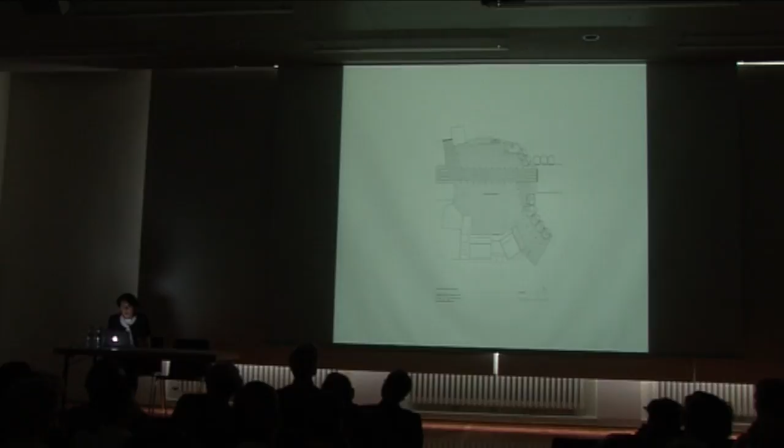So we decided to divide the town hall into two blocks, very tiny blocks. The whole town hall is 300 square meters. So it's really like two tiny blocks, like two houses, but arranged in a way that permits all that open space to build the plaza.

The two blocks are linked by a very light structure where the entrance is placed, and with this decision we built not only the tiny town hall, but we also built the plaza.

...from the new plaza—was to give this tiny building the institutional character that any public building must have, and more so if it's a town hall. So we had the clock, and we had the flags, and we had the plaza. Despite the small scale, really the presence of the town hall is very important in this tiny village.

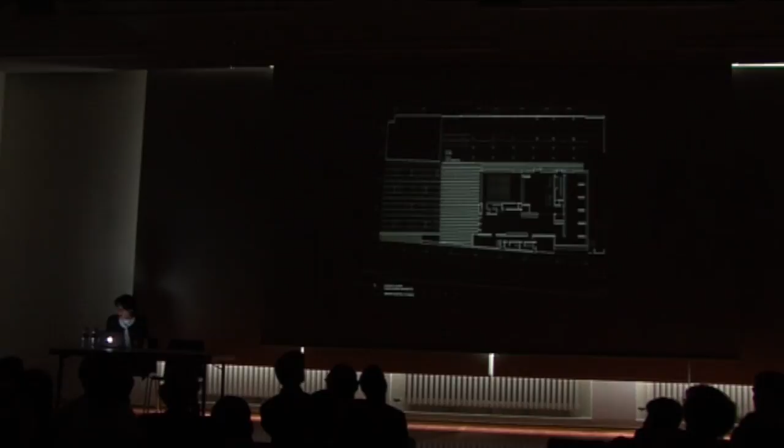And at this point, I also want to explain that this museum in Almería had a beautiful collection of archaeology from Neolithic times, 4,000 years before Christ, and that this beautiful collection was just stacked in boxes in an old warehouse, because there wasn't a place to exhibit all these beautiful pieces.

So it was a necessary museum, but as I said before, the plaza was really the main feature of the project. As you can see, the building is quite opaque towards the city because it's completely surrounded by high-rise dwellings and buildings, and we thought that the building had to be a bit endogamic.

So the building had to be open on the ground floor towards the plaza, but on the upper part it had to be just like Arab architecture that looks towards the interior.

So from the outside it's very compact, and it is built with the natural marble of Almeria quarries. Almeria is one of the places in Spain where we have very important and very large quarries, and we thought it could be a good idea to use this marble to build the opaque facades of the museum.

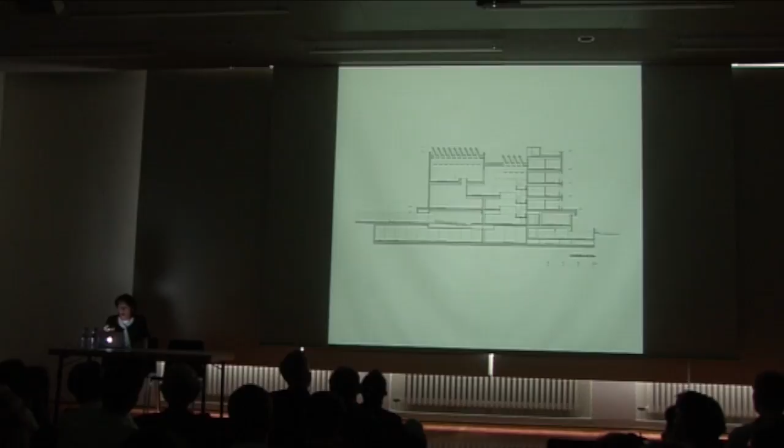The light was also very important, because we had skylights in the roof, but the light in Almeria is very harsh and strong, very white light. So we decided to use a filter.

That's a wooden filter built up with modular pieces of wood, in the same way that ancient Arab architecture also uses these filters for light, to build a ceiling underneath the skylights and the roof. So when the light comes inside, it's not white hard light, but a more delicate light when it comes through the wooden filters.

Well, this is the staircase of the museum that connects all different levels and all the exhibition areas. Everything is open and everything is set up in continuity.

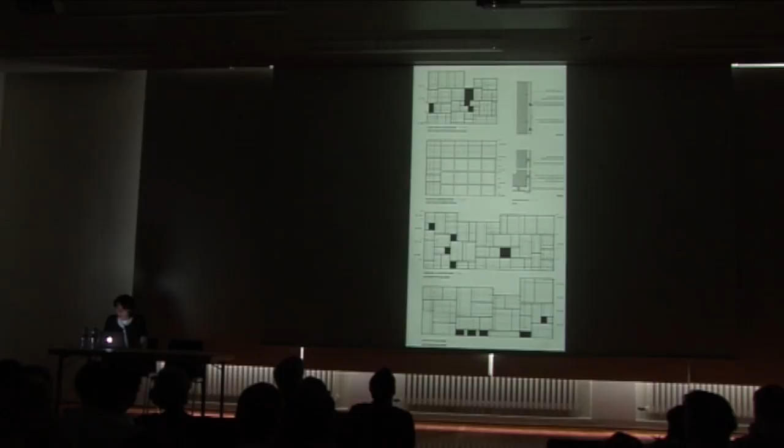Because we didn't have the need of an urban scale on an urban void, since most of the exterior part of the museum is opaque. We only have some viewpoints towards parts of the city that are open onto the walls, so the display of the marble is completely abstract.

Only from the back part of the museum, where the interior parts like the workshops are placed, and where all the offices are placed, we have a more urban character with these openings.

What's most important is that, beside the necessary spaces for the archaeological collection of the Siret collection, architecture has now been able to build a place for the people in Almeria.

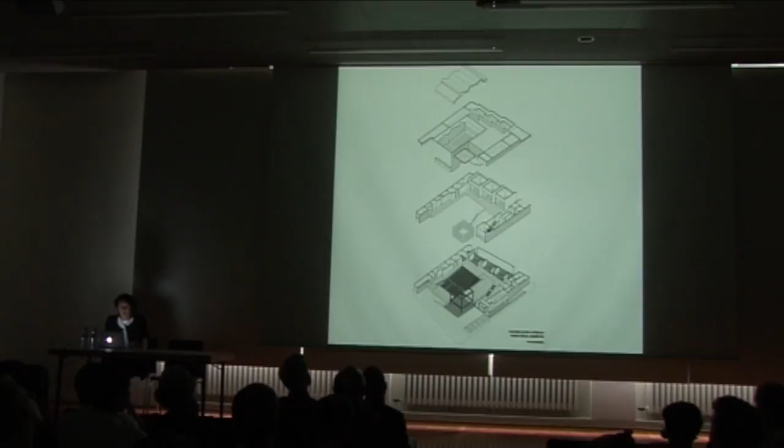This is the simple way in which the program is organized with the auditorium. It seats 700 people, and all the rooms are around the lobby, and the gavia, that's the atrium, is the main feature of the project. That can be seen also from the entrance and from the lobby.

Really, all these indoor-outdoor intermediate spaces are so important, not only in our culture, but in all Mediterranean cultures. There are many beautiful words that sound the same in many languages, just like atrium, patio, belvedere, or galeria. Modern architecture hasn't taken up the best of these beautiful spaces, and in this case we thought they were very important in this place, in Peñíscola.

Well, this is the large auditorium. Here we had a different problem, because we were supposed to have a very little height, only 13 meters, and we had to have all the interior volume for acoustical means. So we decided to build up a very thin layer of concrete that would also deal with all the acoustical part of the program.

But this transparency of the atrium, of the gavia, was important for us, and it can be seen also from the inside of the auditorium. It also shades the interior parts of the lobby, and you can perceive the sea beyond the three-dimensional pieces of ceramic. It's really like a large installation of ceramic, because it's completely open around it, only sheltered on top for rain.

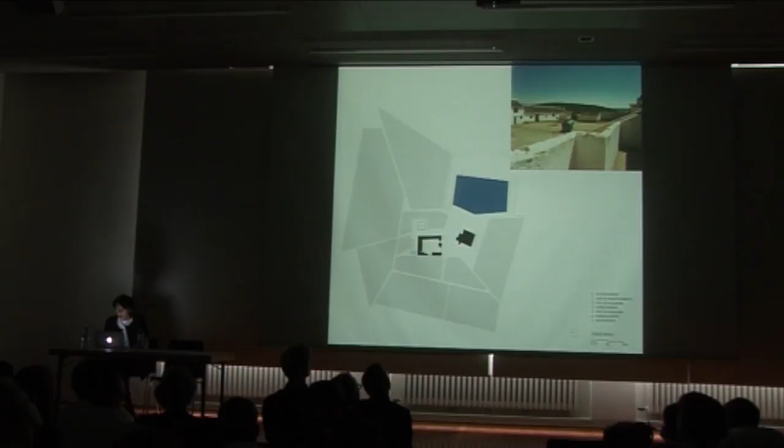So people who were manufacturing quite good wines also wanted to have their winery refurbished. In this case, we had to deal with this beautiful cortijo beside a very large pond in this particular landscape, and we had to build inside the patio of the ancient, existing building.

The patio was very large because originally these patios were used for agriculture, for lorries and cars that came inside. But in our case, the owner wanted to have all these new smaller pieces of architecture, such as rooms for tasting wine, shops, restaurant, or an open space for events and for meeting people, and for meeting points or small congresses.

So we decided to divide the interior part of the patio into different parts with the construction of this star-shaped canopy. It's a very light metal canopy that divides the interior space of the patio, which was very large, but it didn't touch the walls of the existing cortijo. So there is an old architecture and a new architecture that don't touch each other, but are set up together, trying to dialogue to have a new meaning and new uses for the ancient construction.

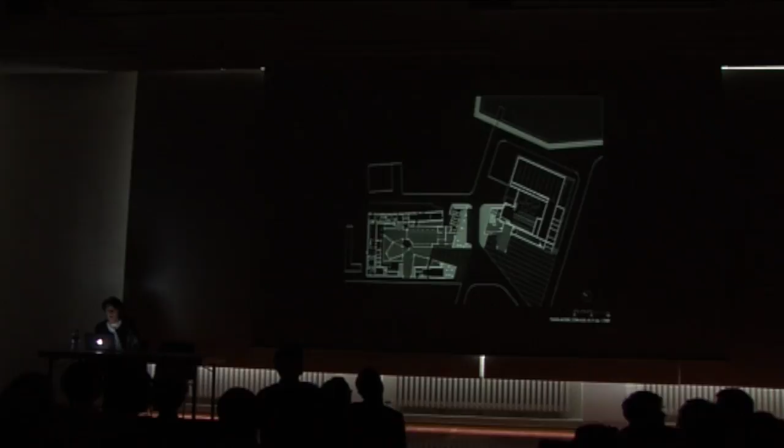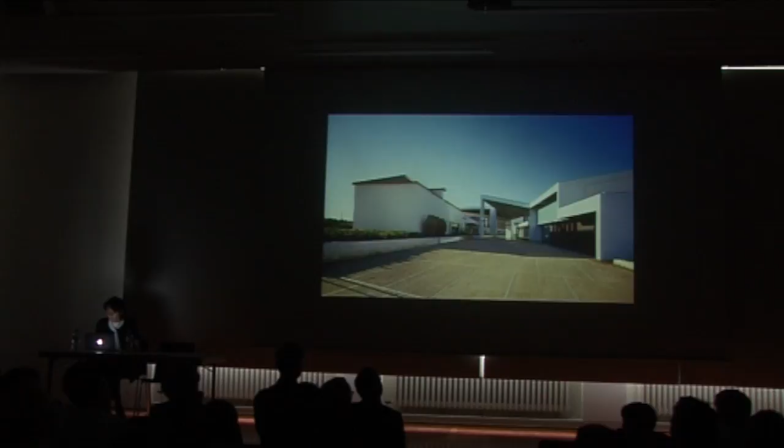As I said, it's a very light metal structure. The peaks of the star volume open towards the landscape, and they give an entrance towards the new complex. All the structure was prefabricated in steel, and one can see the old parts of the existing building and the new architecture, but also intending not to use the same material—one is steel and wood, the other is plaster and brick tiles—but to use the same colors, orange and white, both in the old and the new construction.

And all these open spaces are important in our culture, because we have many months along the year to use them, and people are used to living in the streets and meeting in these indoor-outdoor spaces. Also the large scale of the old courtyard is now divided into all these smaller open areas that are linked to the outside and towards the former construction.

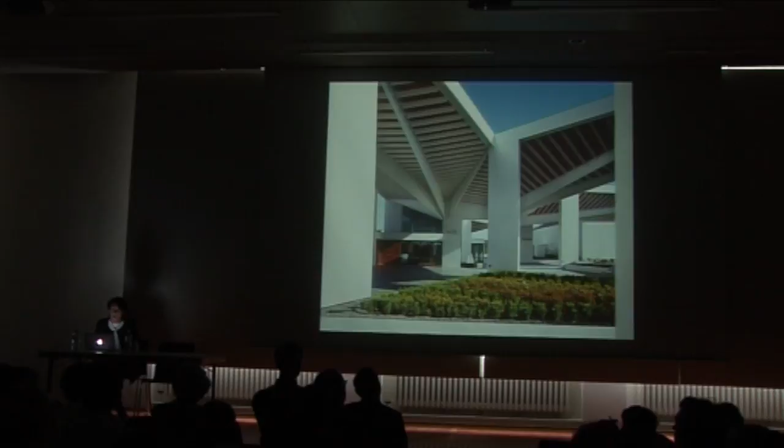And from the inside, one cannot notice when we are inside and outside, because materials are the same and the structure is the same. So there's a sort of transparency between the inside and the outside set up in continuity. In this way, the winery is enlarged and completely transformed, but really we didn't touch the old building—we only refurbished the interior parts.

And at this point, talking about new and old architecture, we had the opportunity to work besides the winery with an ancient construction. We had the opportunity to work with archaeology and with the fragments of the past in these two buildings. One of them is the Olmeda Roman Villa in Palencia, that was opened three years ago.

And the other one, that's the image of the lecture, is this library in Ceuta that also has an archaeological remains and site inside the library. It is important because now in Spain, you know, things have changed a lot for architects.

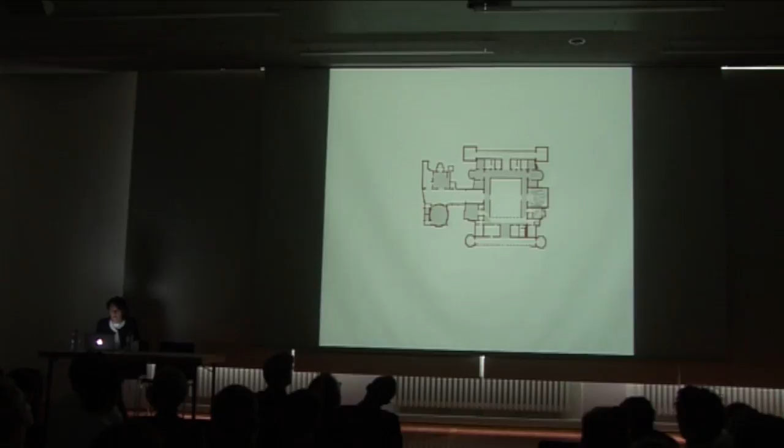The extension of the archaeological area is really very, very big. So we knew how to protect the beautiful mosaics, but we didn't really know how to present the fragments of the past to the visitor, because there are not many references in European architecture for covering such a large excavated area. The excavated area is over 10,000 square meters.

So we decided to wrap up the whole villa with a very light metal facade that embraces and builds a box around the ancient villa.

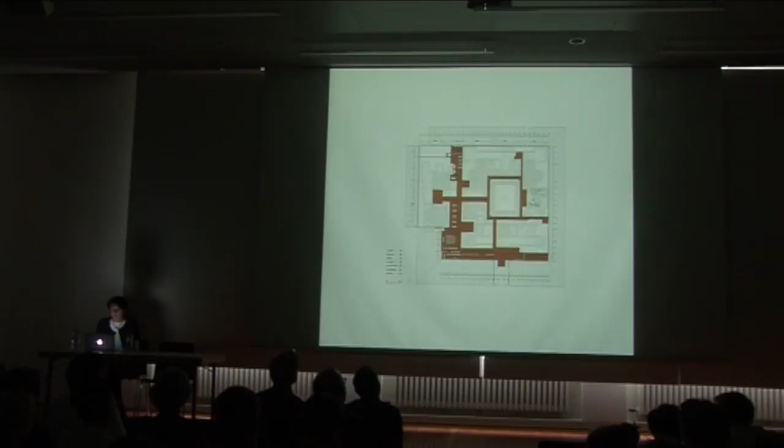We also decided to infiltrate the voids and free spaces with the different parts of the program needed for the museum, such as a restaurant, exhibition area, a very small auditorium, or workshops. Everything was linked by a pedestrian wooden footpath connecting all the different parts of the villa and program, so visitors could understand and it would be comprehensive for them.

The whole plot was covered with 4 vaults, 3 for the villa and another one for the thermal building. Very light vaults built with a metal structure, so as to avoid stepping onto the ancient archaeological finds.

We also wanted transparency inside the space of the villa, a transparency towards all the parts, so the visitor could be aware of the dimension and size of the interior space.

We also wanted to show all the different rooms of the villa, not only the mosaics like a tapestry, but also to show the different heights of the rooms, because we only had the lower part of the Roman brick walls.

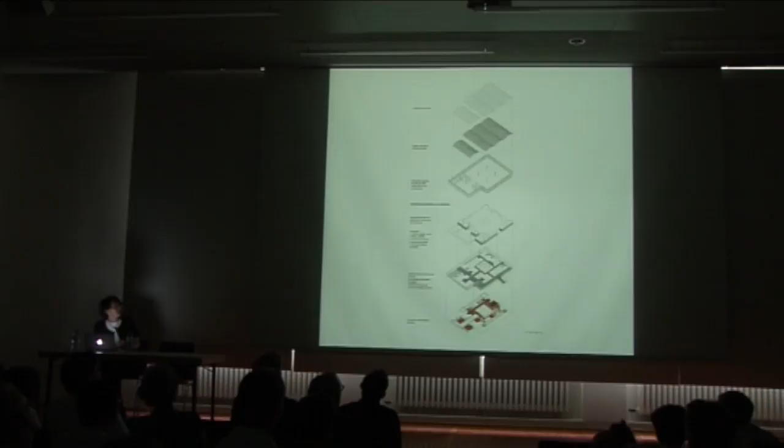This is the display of the program, with the archaeological remains underneath, and on top the different parts of the program, and the light facade that wraps all around it. At last, the covering with these very light metal vaults covers all the space.

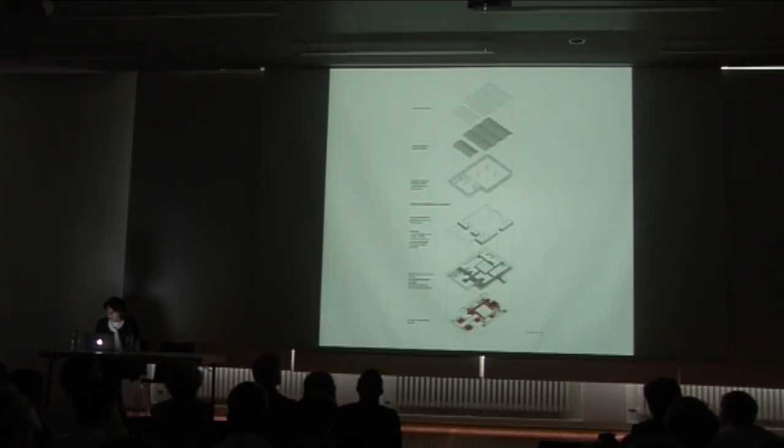The program was very simple, and it is all set up in the same space of the museum.

Here we can see the facade, a folded facade. Now we'll see some photographs.

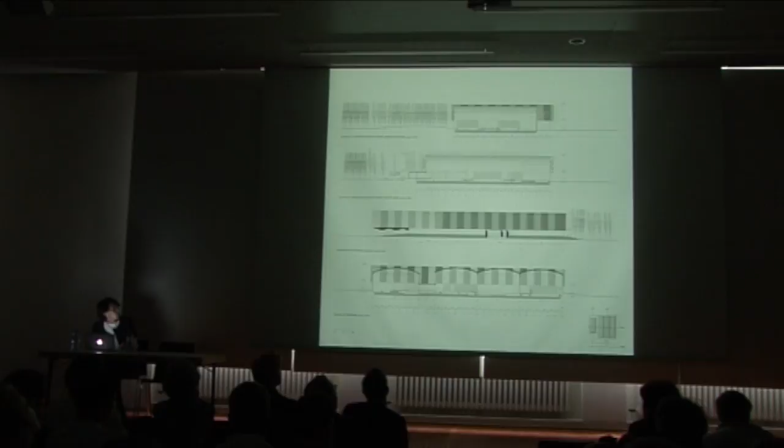This footpath is elevated 1.5 meters on top of the Roman brick wall, so one can see from a very good point of view all the ancient mosaics, and also the whole space of the museum, because this light structure is only supported by 4 columns in the corners of the central courtyard.

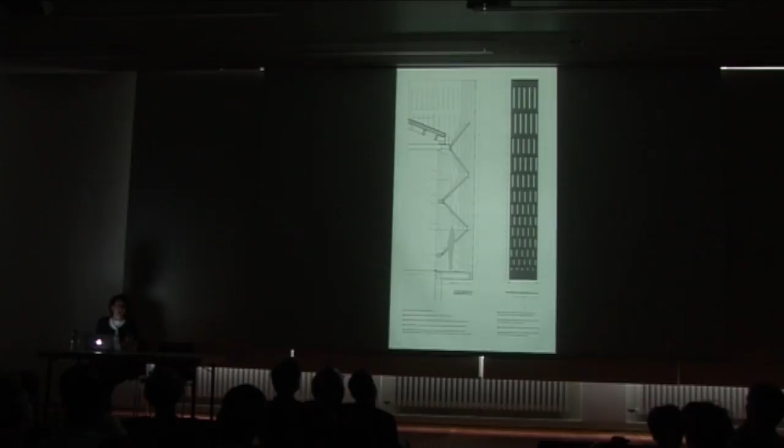And this is the way the structure and the facade is set up freely, so it looks very light, because it's not stuck to the interior part of the building. Between the two layers, we have this technical, very low technical walkway, just for cleaning, maintenance, and lighting.

Transparency was important in order to blend the building with the sky and with the landscape. The whole building is embraced by this green slope that gives us the meter we need to enter in a very slight way on top of the pedestrian footpath. And this is the building in the landscape.

And now to finish, the last building is this library in Ceuta. Now the plan of our Iberian Peninsula is important to explain that Ceuta is really in the northern part of Africa. It is completely surrounded by Morocco, but it is a Spanish city. It's not a colony. It was Spanish for several centuries, but before it was Portuguese.

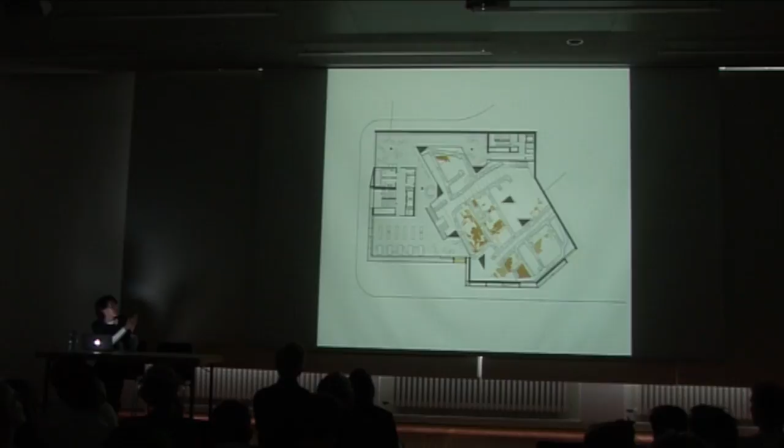Here in this plan you can see this orthogonal direction. I was explaining about the ancient city, the Middle-Age city, that is completely turned towards the orthogonal axis of contemporary Ceuta.

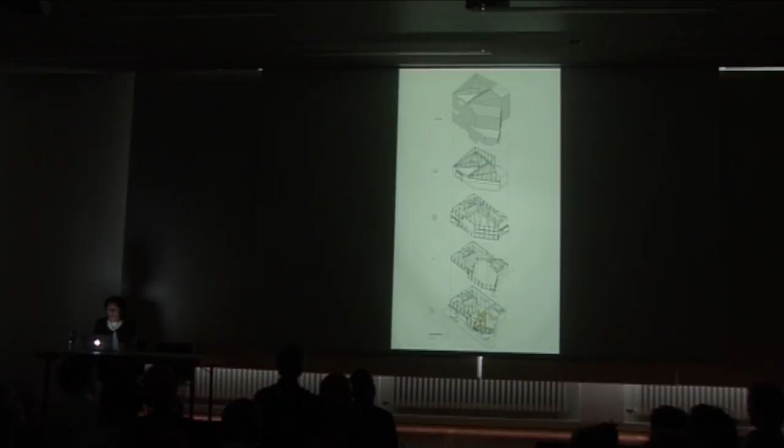So the library grows up in the same way as the Almeria Museum. The library grows up in height, and all the lecture rooms are placed on several levels, all overlooking the ancient ruin and articulated with the site, because the site is so steep.

We have entrances at different levels towards the library. Something funny that's inverted in this library is that the book storage can't be underneath the library, so the book storage and all the machinery for installations are on the upper parts of the building. So the program is completely inverted in this library.

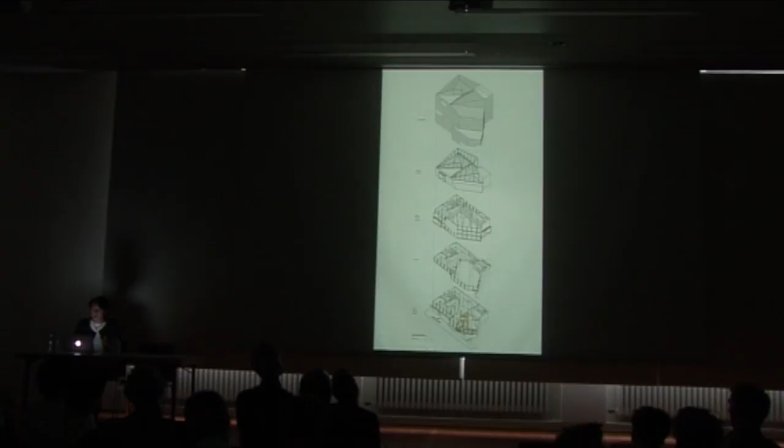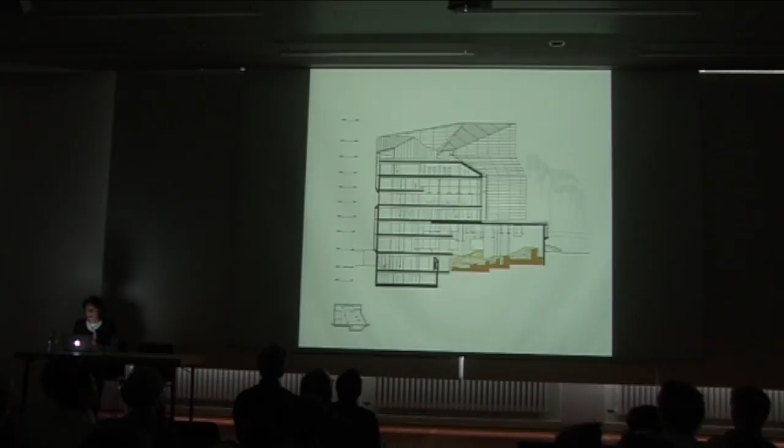Here it's easier to see how the library is organized in 7 levels, with the archaeological area in the lower part with natural light. And also, as I said before, there are many things that are interesting for us architects.

Not only the site, the materials, or the program, but we think architecture is not just construction or building business, because architecture, like other arts, establishes transversal relations with other arts and other things that can make building and construction much better. I think that's the most beautiful part of architecture, that an architect can give much more than working alone can give.

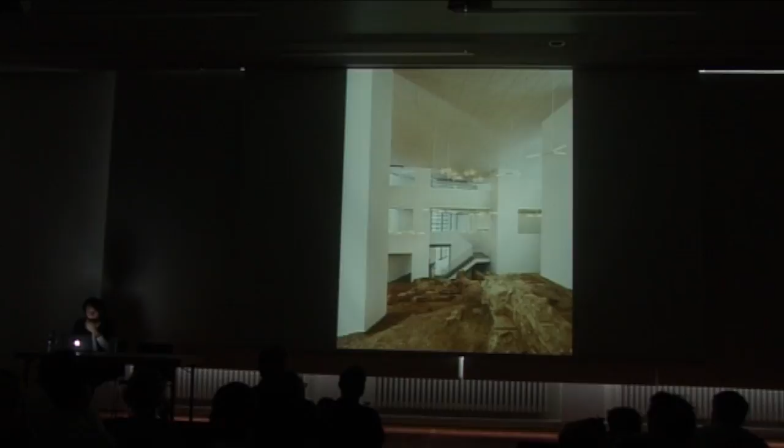Now the building is finished, and it's going to be open to the public in September. Now we are with furnishing, taking inside the books, and finishing all the archaeological remains.

This is the ceiling of the central part of the library, with two directions: the direction of contemporary Ceuta and the direction of ancient Ceuta, with this triangular scheme. And with that triangular pattern the lights were also set up on top of the archaeological remains.

On top, these empty spaces, completely finished, are now being completed with the books. So in one or two months' time, the library will be full of people and full of books.

That is one of the important things for this library, because as I said before, Ceuta is really the frontier, the border between Europe and Africa. From the social point of view it's quite a difficult and hard place, and culture, books, and knowledge are very important in this part of the city.

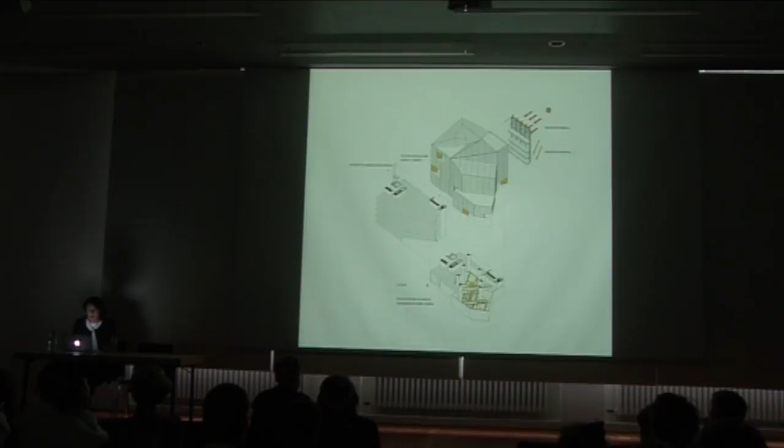So the final facade includes different layers: this interior one is a glass wall that can be easily cleaned from the outside, because there is a technical pasarela, a walkway, to keep the interior and outer parts separate. It's sort of very low tech, but it works out quite well for the sun and the shade, keeping the library cool in summer.

This aluminum facade has different sizes of hollows, so it can shade more the southern and western parts of the library, while in the northern part they are larger.

So from the outside, we unify all these different things with a single facade, but it looks like just a single volume, because this metal facade also folds up towards the roof to cover all the machinery and installations on top of the library.

Here you can see how steep the topography is. The library is completely tied up to the ground in this concrete basement. These are different aspects of the way the library gets up to the ground and links to this small site we had to build the library on.